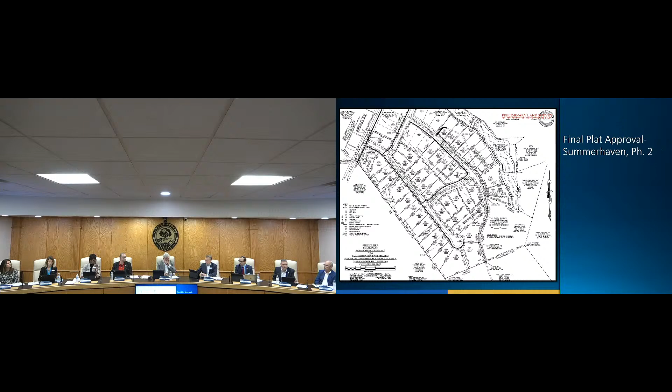Any further discussion? I would like to just say Sarah Bradley is no relation to me. And she's very happy. I'm kidding.

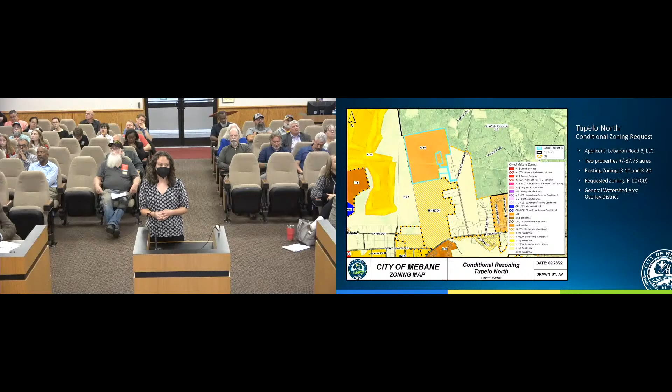As you can see, the surrounding zoning is largely residential. There is R12 conditional to the south, which is the Tupelo Junction subdivision approved in August 2020. The properties are located in the General Watershed Area Overlay District, which means there are built-upon area restrictions that apply.

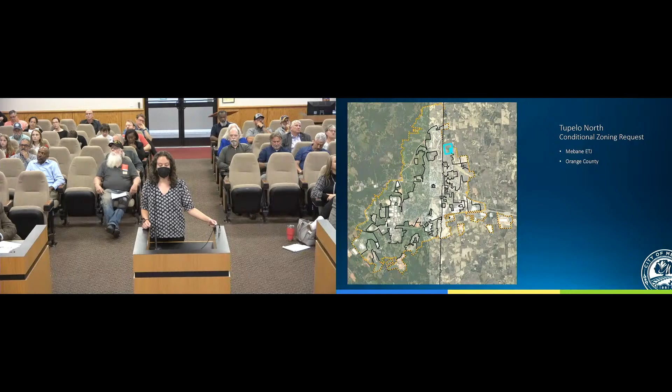The properties are located in Mebane's extraterritorial jurisdiction. They are on the border of the ETJ and in Orange County. Currently, the properties are being used for a single-family home, which has a driveway connection to Saddle Club Road. It has historically been used as a bee farm and is forested. There is floodplain on the property along with streams.

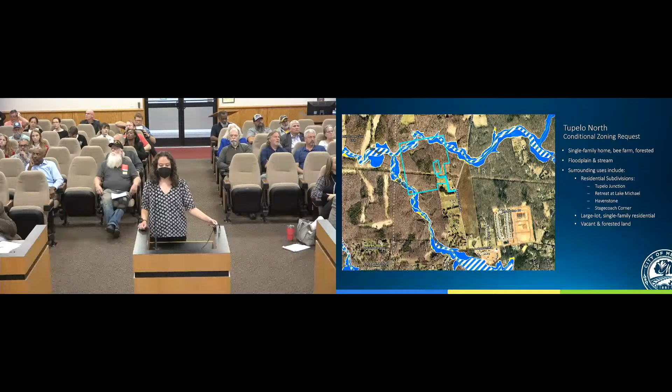Immediately surrounding the two properties are large lot, single-family residential properties to the north and east, and additionally vacant and forested land. There are residential subdivisions in the immediate area, including Tupelo Junction mentioned previously, which is to the south, and then Retreat at Lake Michael, Havenstone, and Stagecoach Corner are recent approvals. The properties are located in the secondary growth strategy area as identified by Mebane by Design, which is our comprehensive land development plan. The green seen here on the screen indicates conservation area that is identified in our planning documents when there is contiguous forest cover.

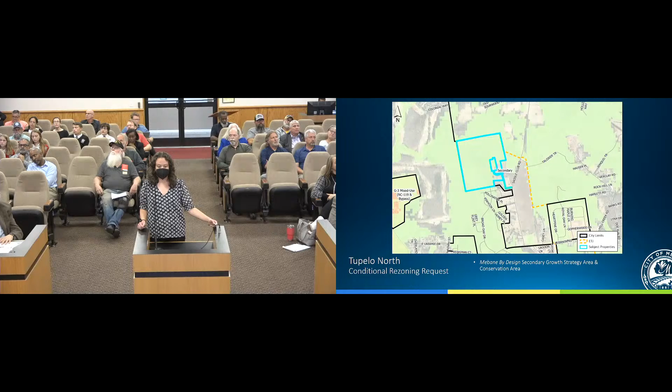The request before you is for R12 conditional district to allow for a residential cluster development of 207 single-family homes. The street network would include a 5-foot sidewalk on one side of all streets. Additionally, there is a public multi-use path network proposed running through the middle of the site, and there are traffic calming devices that intersect with that multi-use path.

There's just over 37 acres of private open space dedicated here, and there would be a continuation of Tupelo Junction in terms of the street network. There are no new driveway access points proposed as the driveway entrances for Tupelo Junction would be used.

Additionally, the subdivision required a traffic impact analysis, which was reviewed by NCDOT and city staff. The results require the developer provide a right turn lane on Lebanon Road at the intersection with Stagecoach Road. However, given concerns with that intersection, the developer has committed to completing a signal warrant analysis to see if a traffic signal would better serve that intersection and if it would be warranted.

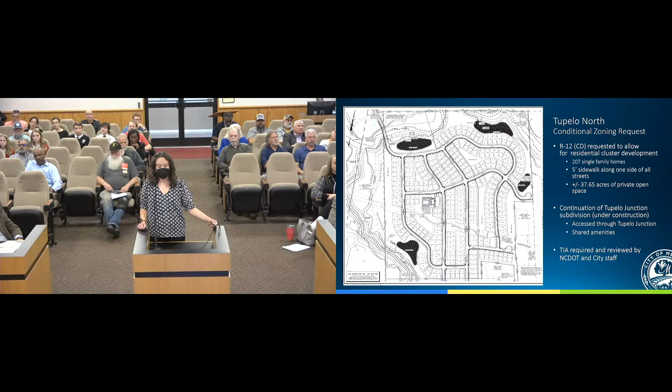As a conditional rezoning, this request is site specific. Additionally, there are certain conditions the developer is requesting, including some deviations from dimensional requirements typically required of the R12 zoning district, such as a slight reduction in lot width, along with some reduction in side, corner side, and rear setbacks.

Finally, the UDO requires that just under 6 acres of public recreation area be provided. The developer is proposing nearly a half acre through a public multi-use path, with the additional public recreation area being provided via a payment in lieu, which is allowed by the UDO.

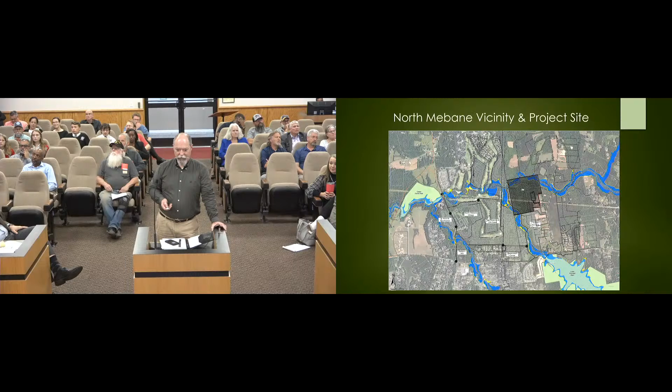Just another quick view of both Tupelo Junction and Tupelo Junction North, just to show how this is a continuation of Tupelo Junction. The landowner and the developers, for various reasons, decided to split the property up into two different transactions. So here we are now with the continuation of Tupelo Junction.

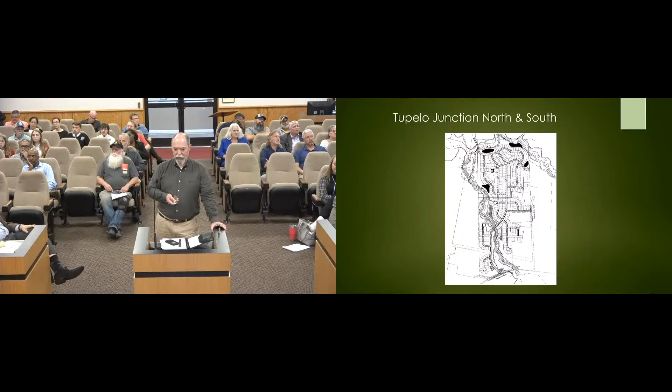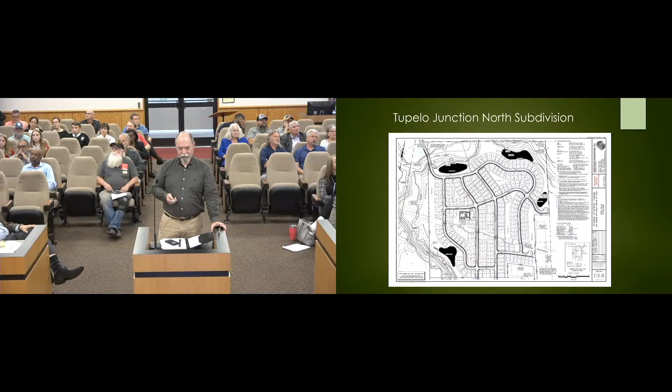Here's a closer view of our site. The current zoning, as Ashley said, is R10 and R20. It was previously zoned as part of, or rezoned to R10 as part of the Landing at Lake Michael project around 2005. They didn't split up the property exactly as it's being split up now, but our portion of the property that's Tupelo North originally had about 170 lots in the R10 configuration.

And they had lots generally in the 10,000 to 16,000 square foot size with minimal open space. For the most part, like around the perimeter of the site, the lots themselves would back up to the perimeter property lines of the site.

We're proposing an R12 conditional zoning, 207 lots in a cluster subdivision arrangement. Our lot sizes will be 7,200 to just under 11,000 square feet, and we'll be providing 37.7 acres of open space. The conditional zoning is required due to the cluster development nature, and also because we're requesting waivers for reduced lot area as part of the cluster development, lot width, side setbacks, rear setbacks, and the previously mentioned public recreation payment in lieu.

Again, the site is 87.73 acres. This came up at planning board - they were curious. Only 4 acres of that are R20, that's the existing house and access out to Saddle Club Road, and the remainder of the site is R10, that's the 83 acres.

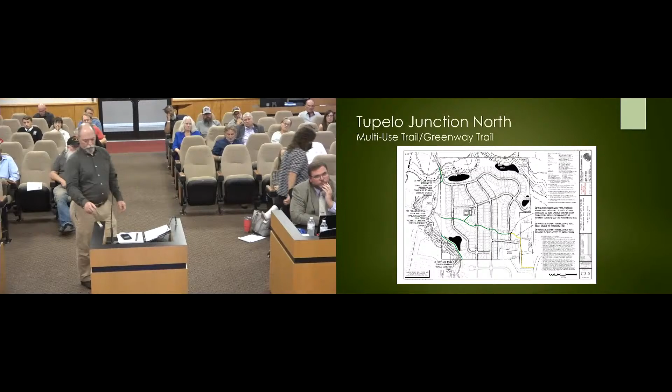Well, that was my thought process, and has been for years, that payment in lieu wasn't an avoidance of providing public recreation space, but a better way to apply the money. But it's absolutely separate from open space. Thank you for that clarification. They have to require both, so.

I think something else the gentleman said too, was that if we did a payment in lieu for public recreation space, there was no place in the neighborhood for these residents to recreate. It was my understanding that the public recreation space meant it was a park for anyone from anywhere in Mebane to recreate.

These folks will be able to use the open space. We haven't gotten to the amenity buildings yet, but we have those, and we have the multi-use trail, which will be open to anybody, but will obviously be most convenient to these folks. So they do have recreation options in the neighborhood for the residents. And like everyone was saying, we think it's generally better to pool that other money for larger, more impressive public parks instead of a bunch of penny-packet little public parks around the city.

Is it fair to delineate the difference between the private and public space? The private space is the responsibility of the HOA to maintain and preserve, versus the public multi-use path, which would be on the city to maintain and preserve. Yes, ma'am, that's correct, because that'll be part of our multi-use path system.

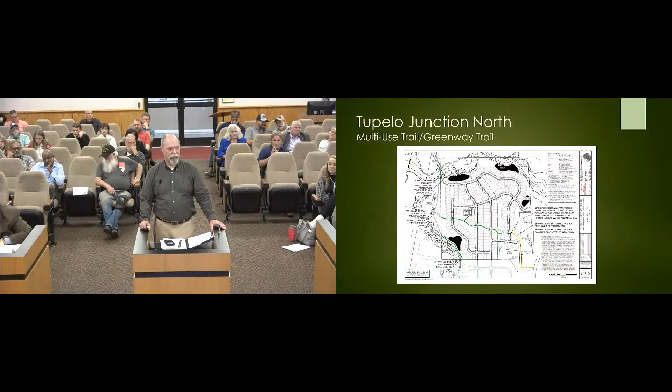I think that's another consideration for you all too—probably larger parks are easier for you to maintain than a bunch of distributed parks. So, to clarify, we typically take over these multi-use paths once there's justification of a significant amount connected, along with a trailhead. South of the interstate at some subdivisions, there are multi-use paths that have been part of the approval process. They remain part of the HOA's maintenance until a significant or justified amount is there with trailheads and different opportunities, and then they become part of the city system.

I think the earlier speaker made a comment that really sticks, and that is we need to make sure our calculations for payment in lieu keep up with inflation and the cost of properties. If it was based on $20,000 an acre and they're now going for $60,000 an acre, we may need to make sure the formulas kept pace.

But I did have the understanding that putting money toward big parks was better for recreation than trying to administer and keep up small parks. That had always been my understanding. Can you clarify the calculation of payment in lieu, just for all of our benefit?

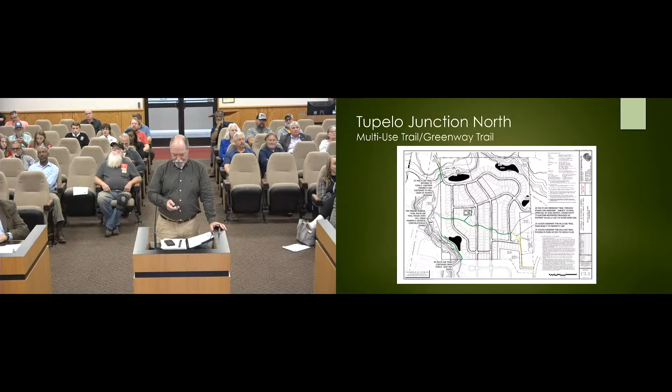We're talking about stormwater. I pointed out the four SCMs that we have, as a component of the project, open space and natural buffers, primarily located around the perimeter but also within the site. We also have supplemental plantings on the open space in the southeast corner due to the lack of existing vegetation there and the proximity of a neighboring residence.

The project will have a neighborhood amenity that's going to be a pool and pool house building with bath and changing rooms, likely a covered patio area, and that's also going to have parking for that, and the mail kiosks will be located there at the pool house.

Again, we provide a 10-foot paved connection spur to the multi-use path, greenway trail system, and that ends right next to the bike parking, so that'll be convenient. There will be full reciprocity and shared amenity use with the southern portion of Tupelo Junction, so there'll be full cross access for those folks. The people on the south can use the pool, and the people on the north can use the clubhouse building currently built down on the south side. The amenity is to be constructed at the start of the second phase.

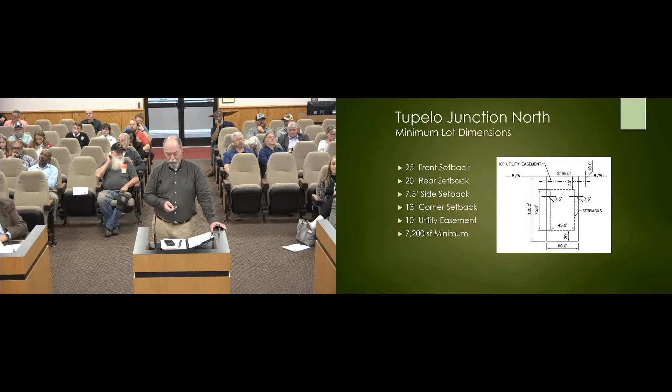We will be doing, these are the architectural commitments from the builder - fiber cement siding, which also comports with the 7.5-foot side setback we're requesting. The fiber cement is fire resistant, so that provides a little extra protection for the houses being just slightly closer together.

The exterior styles of the houses - the front elevations will include at least 2 of: horizontal siding, shake siding, board and batten, and brick or cultured stone, just to mix up the front facings of the house. There'll be decorative front doors with a minimum of 25% glazing or a window transom. Each house will have a covered front porch or front entry. Roofing will be a minimum 6:12 pitch, 20-year asphalt shingles, and a minimum 6-inch overhang.

These will be slab construction with 5-inch gutters and downspouts. All the houses will be 2-car garage, and the garage doors will feature decorative hardware. Front yards will be sodded.

The ranch plans are 1,400 to 2,000 square feet. The 2-story plans are 1,800 to 3,200 square feet, with a variety of bedroom and bathroom combinations.

What would be the rough breakdown of the ranch and 2-story among the two lots? I don't know that at this time, I'm not sure the developers made that. Curious, did they say anything?

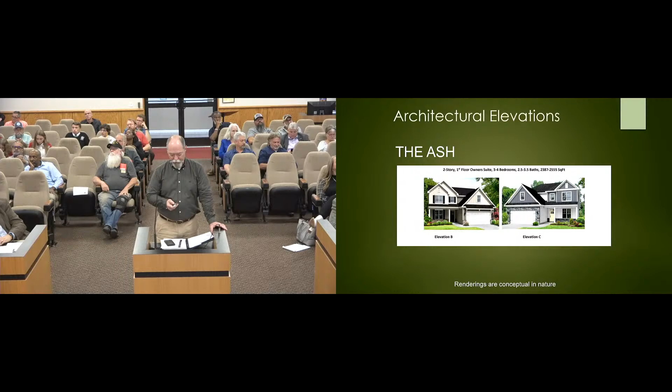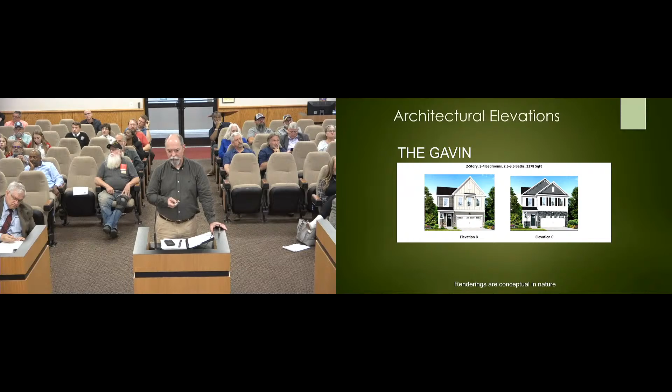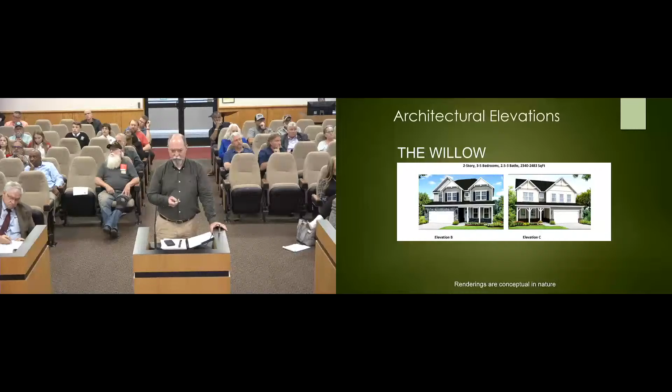So to sum up, Tupelo Junction North is designed as an R12 residential cluster subdivision with lot areas reduced up to 40% per the UDO to allow for preservation of private open space as part of the neighborhood. As a result, we're requesting UDO waivers to reduce the minimum lot frontage from 65 feet to 60, and reducing the side setbacks from 10 to 7.5.

I'll note that the southern portion of Tupelo Junction currently has 5-foot setbacks. They were developed before the UDO was updated, or they had a different waiver. We're asking for the corner setbacks to be reduced from 18 to 13, and the rear lot setbacks from 25 to 20, although we've got quite a bit of open space that helps keep the houses further apart.

The backs of the houses are further apart than even this would suggest, because we have a minimum of 15 feet additional open space behind the lots. And again, we've reduced the required public recreation space from 5.94 acres, with a half acre for the trail, for a payment in lieu of $16,000.

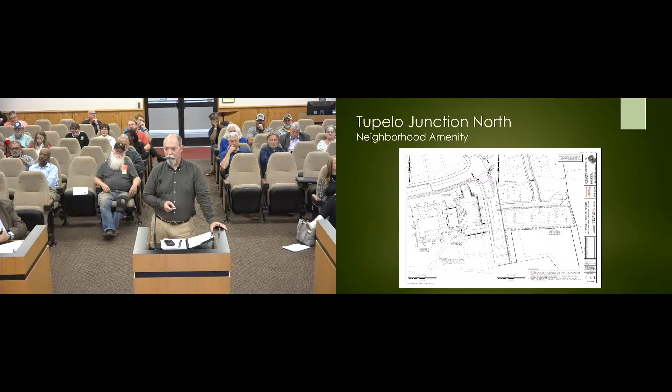Councilmember White, I might need to clarify that response. The UDO does require 1 tree, but that requirement was passed in June of this year, and the development director can correct me if I'm wrong. Since this development was submitted in May, they are not required to adhere to that. So if they do it, it would have to be a voluntary condition.

Is that something you'd consider offering? Yeah, we can do that certainly.

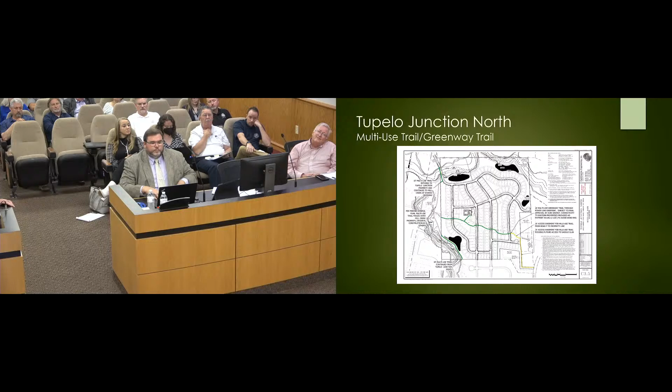Tim, going back to the amenity, you stated it would be built in phase 2. That's correct. So my question is, will you be bonding it? Let's say for example, if something comes up and you don't build this particular development, I want to protect the ones that will be there by bonding it.

I want to protect that amenity so we don't run into what we ran into in the past. Yes, that's what we're planning. So yes, bonding the amenity will be part of that.

I'll also mention that the amenity for the southern portion of Tupelo is actually already built. Again, there's going to be a full cross access easement between the two developments, so as soon as phase 1 goes in, they're already going to have access to the clubhouse that's currently constructed.

Okay, so the clubhouse is on the phase in South Park? Yes, which is technically a separate development, but there will be two HOAs, and they will have a full cross access agreement for both the HOAs and all the residents.

Thank you. I actually did have one question. The 12-inch sewer and water going northwest, will that be pending any developments, or are you just going to go straight to the Mill Creek developments?

We'll go to our property line, or just over it, possibly. No, we can't go over it because it's their property. But we will go to our property line and provide a proper connection there for them. We'll provide an easement to the property line and stop just short, and probably have to bond a short section of it. No loop at this time. No.

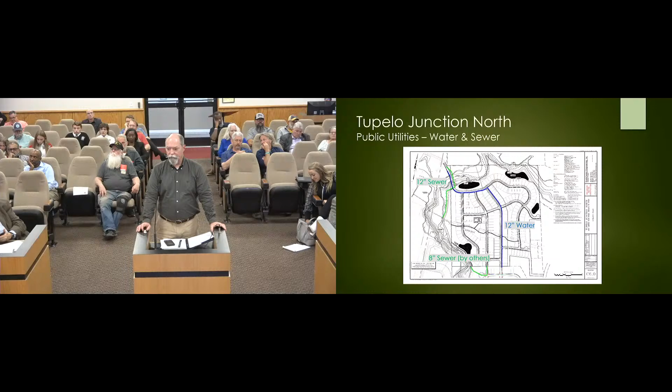Bill Cuff with Earth Centric Engineering. Just wanted to clarify something.

There actually is a water loop there. It would just be that the 12-inch is like the main trunk line, but because of the way the water is actually directed through the other lots or through the other roadways, it does create a loop system through there as well. So that will stabilize the entire set of water line.

The main reason for putting that 12-inch trunk line is to actually provide better stabilization for the groups further north of us. So that is the purpose there, is to upsize that line for that. And that would be done with the work with the city in terms of, as Tim said before, calculations. I believe if you actually calculate it out right now, it would actually work with an 8-inch line through there.

But the city would prefer the 12-inch because it does provide better service. So there's already a connection there from the northwest. Not yet, but it will. It is intended to, when they extend down, when the neighboring Mill Creek development extends down, it would tie into that.

I think what Phil was saying is we do create some loops, like we have water connections. We have 2 connections with water to Tupelo South. So if something were to happen to this side, it can provide connectivity, and several of these loop around. So there's a lot of interconnectivity. It's just the eventual large loop, Mill Creek, that's still kind of out of our control, but we're providing the access.

As soon as it stops being a bee farm, somebody's going to be assessed for the full tax value. But at this very moment, technically, the assessed value is $20,000 on those 83 acres. That's why they can come in and say, 'according to the formula, we only owe you $16,000 instead of 5 acres of public recreation space.' And if the rules lead you to an absurd place, you don't have to follow them there.

Thank you, Mayor. Dan Shannon. My home is 4681 Mebane Rogers Road. I'm about a mile and a half from Tupelo Junction, and I have a daughter and her husband who are approximately 2 miles from there.

Chief Wells, in the spirit of looking at how the fire department would handle this, I'm sure Mebane would offer support, but can you tell us how the fire system out of Orange County, the closest one there, and how Mebane would respond to a house fire there?

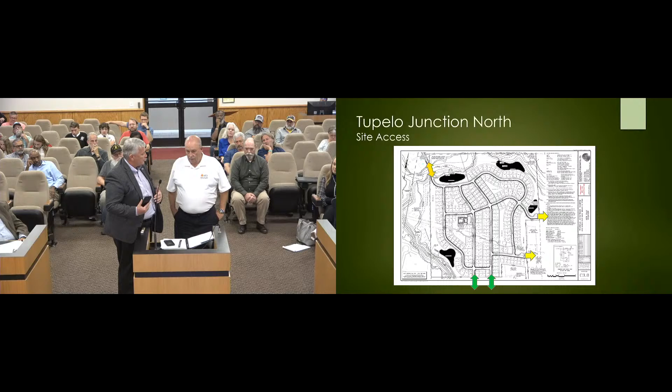The question again was, how are we going to handle a fire in that neighborhood, the support in that area? I know it's mostly in Orange County, but I'm a mile and a half from there, and my daughter is 2 miles inside Orange County in Efland.

Currently, Mr. Mayor, members of the council, it's in Orange County, outside the city limits. It's in Efland's fire district. It's going to be in the city limits, so it will continue to be our primary response, and Efland will respond mutual aid on working structure fires. We also have other resources we can call as well.

Does that help you? That does, but there's also concern about another development across the county lines, about 1,500 houses and condominiums I believe. Is there discussion or potential for another station anywhere near there? We just recently had an analysis done on station locations, and the two target areas were west and east, south of the interstate.

There's a station within 1.5 to 2 miles of that area. It's manned with an engine company, a ladder company, a rescue company, and a brush truck. So you feel like it's adequate with the amount of housing proposed in that area in the next 5 years or so?

I think so. But stations are decided mainly by response time, correct me if I'm wrong, guys. It doesn't matter if it's 1,500 houses or 50 houses, it's only the response time that's important in where you locate. Is that one of the considerations or the only consideration? For ISO purposes, when they evaluate a fire department, they've strictly gone to, we used to do the 1.5 mile districts.

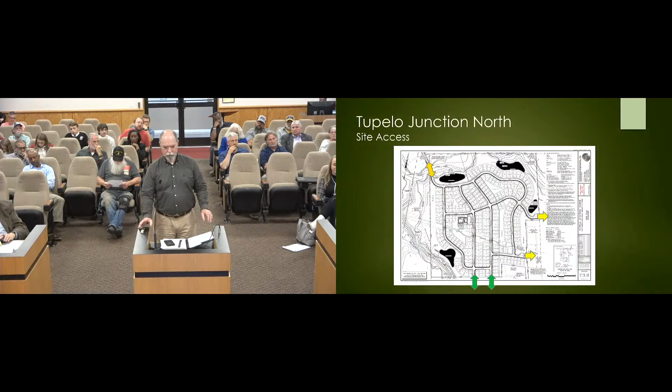Thank you. Also, Mr. Mayor, Chief Lewis attends the technical review committee, and this type of material is discussed as part of that. There have been some areas where we cannot provide fire coverage, and we've shared with the developer at that point that it's an issue, and sometimes they don't move forward if we can't provide coverage.

Could we get a little more clarity on some of Mr. Cannell's comments regarding assessed and deferred tax values? I don't want to get into a legal quagmire, but I do want to understand the situation.

Legal quagmire is the example there. The same answers still apply. We still have to follow court precedents and general statutes. I understand his statement that it would be better if revaluation was done more often, if the requirements related to being a farm didn't impact the property or the tax rates. But though we are a Dillon rule state, as local government creatures of the state, we have to have general statute authority to undertake things.

Also, referencing court precedents, this is the same as we went through with our system development fees. We have to be very careful in justifying what we charge. The city attorney has looked through this in the past, he continues to look at it, and we do as well. But I would say the same answers still apply, and also the answer from the Recreation and Parks Director about centralized parks still applies.

It's a very delicate and complex situation, and I'm not making light of it. It's just very difficult to ensure we will not be in a lawsuit where we lose and have to pay significant damages, which has occurred for other local governments in North Carolina. So, I certainly don't mind, and I'm sure council doesn't either, passing on these concerns to their General Assembly delegation.

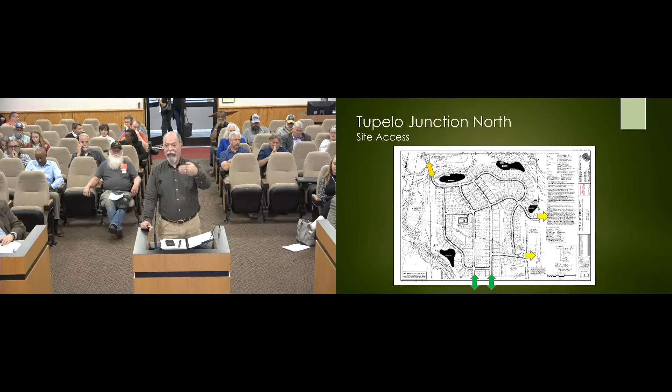Any other questions from the council? All right. Yes, sir, Mr. Mayor.

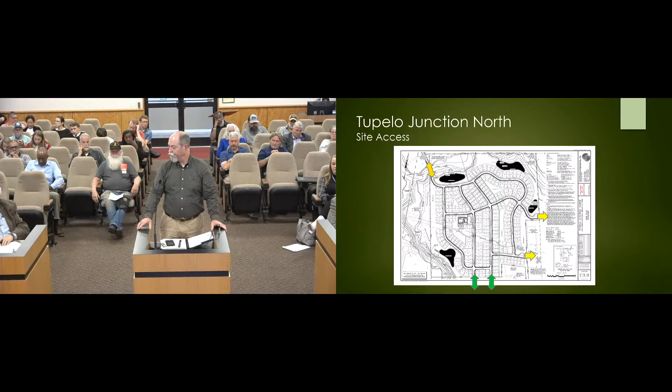Is there any further questions from the citizens? All right, Councilman, make a motion to close the public hearing. Got a motion and a second to close the public hearing. Any further discussion? If not, all those in favor say aye. Any opposed? All right, motion carries to close the public hearing.

Okay, what's the pleasure of council? Thank you very much. Sorry, you're not done yet. No, I was actually going to make a motion.

What I was going to say is I typically am a bit of a stickler on setbacks, but I have had the opportunity to see this concept with one of these builders from the Tupelo subdivision in sort of the cluster setting, and they've done an amazing job with the recreation space. So in consideration of that, that's where my motion is coming from.

I would like to make a motion to approve the R12 CD zoning as presented, and to find that the application is consistent with the objectives and goals in the city's 2017 Comprehensive Land Development Plan, Mebane by Design. The request is for property within the city's G4 secondary growth area, which is generally residential and commercial in nature, is providing community facilities in the form of a greenway consistent with the growth management goal, and provides greenway and open space in a developing area connecting to other locations, consistent with the open space and natural resource protection goal.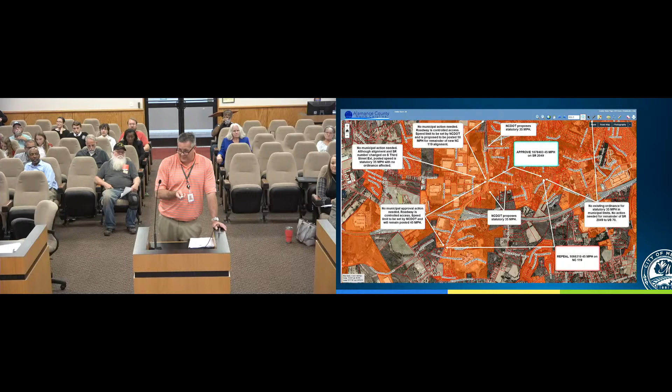Need a motion? I've got some other maps, you want to take a look at those? So this was the 119 area, this is Mebane Oaks Road. There was an existing 35-mile-per-hour ordinance at Mebane Oaks at 5th Street. We're recommending to repeal that ordinance because it's within the city limits and you don't need an ordinance for that.

This is for the new alignment of SR 1973 near the town public works facilities. We're recommending the town concur with the 25-mile-per-hour ordinance on the new section, especially with all the athletic fields and trucks coming on and off that. This is consistent with what we're doing outside the city limits - it's 25 in those residential neighborhoods, so it'd be a uniform speed limit through that area.

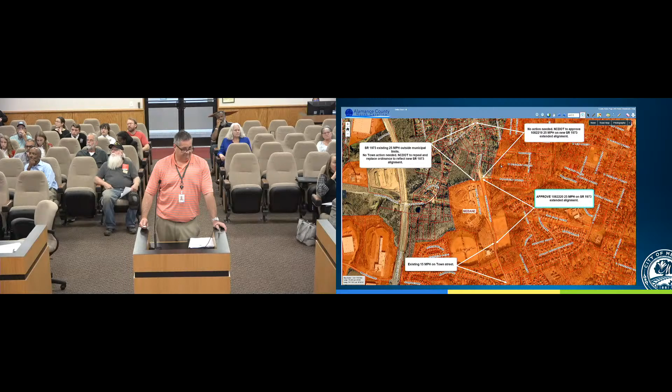And the last one was on Center Street. It's just changing the reference from 119 to the secondary road number. Limits remain the same, speed limit remains the same. That's all I have. I'm here for you guys.

Any questions? For general interest, could you just explain the process for speed limit review? Because we do get questions from the public about speed limits and how they're decided, and this might be a good opportunity to clarify that. In general, we'd start with your local DOT contacts and ask for a review, and I would preface that by make sure it's on a state road. If it's your road, you can certainly address that without DOT involvement.

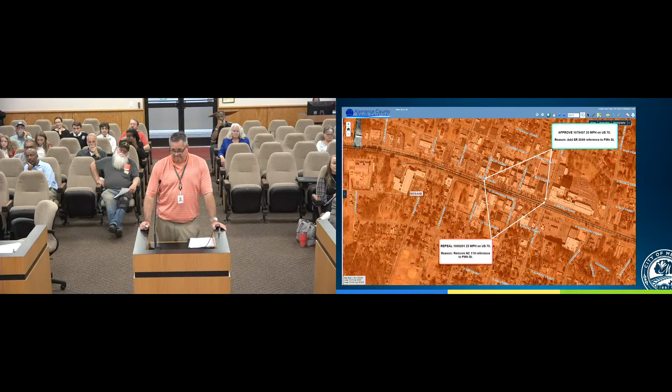Any other questions? If not, need a motion. To reflect the rerouting of North Carolina 119 from 5th Street to the newly constructed alignment, and assignment of secondary road number SR 2049 to existing 5th Street, I make the motion to repeal the 45-mile-an-hour ordinance 1066310 on existing 119 5th Street and approve the 45-mile-an-hour speed limit ordinance 1078403 on State Road 2049, which is 5th Street.

Make a motion to repeal the 25-mile-an-hour ordinance 1000201 on existing US 70, which is West Center Street, and approve the 25-mile-an-hour ordinance 1078407 on US 70, which is West Center Street.

I make the motion to repeal the 35-mile ordinance 1051184 on State Road 1007, Mebane Oaks Road. Note there's no replacement ordinance required since the posted 35-mile speed limit is covered by general statutes within the city limits. And to reflect extension of State Road 1973, Tate Avenue to Rigador Street, I make the motion for approval of the 25-mile ordinance 1082220 on newly constructed State Road 1973 within municipal limits south of Roosevelt Street.

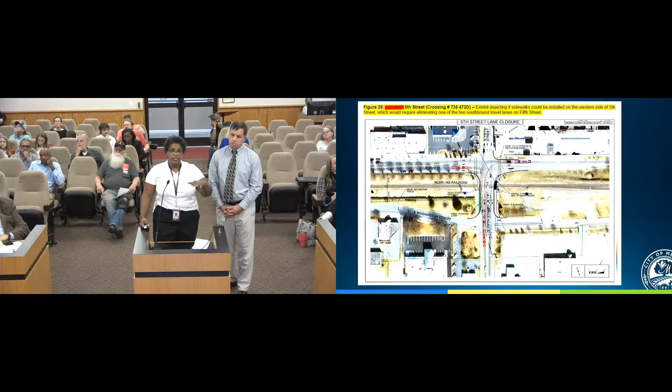Is this kind of your final proposal, and now you'd want to do studies to move ahead, or where exactly does this stand? The way the TSS works, it's an actual presentation of recommendations. It still needs to go through the design process to come up with the actual measurements, the through points, etc., to make a final decision. So right now what you have is just an overview of what we're recommending for safety purposes at this intersection. There were some feasibility concerns due to elevations on that southwest corner. Does that mean those have been resolved, or that they'll just be looked at further? They will be looked at further.

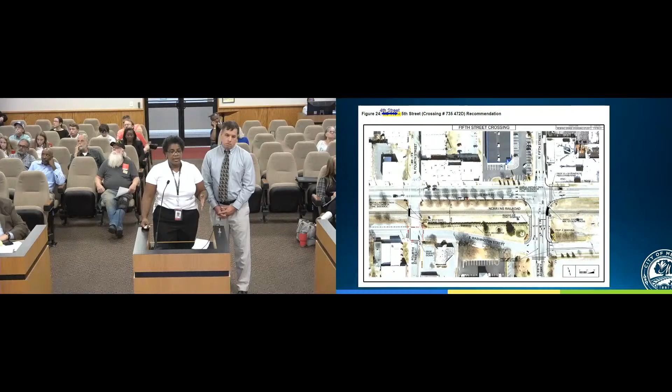The next intersection is Fourth Street. Fourth Street will be adding a sidewalk onto the west side to allow for better pedestrian movement from Washington to US 70. The same will hold true for Third Street, to allow for ease of pedestrian movement from Washington to Highway 70.

When we discussed Third Street, I forget the name you had for it, but there was like a back and forth idea. Is that not here? Yes, here, that's a Z pattern. That's right. What we presented to you previously was what was discussed back in 2018. But due to the fact that we have a changed council, we're looking at it based off the actual recommendations provided in the TSS and starting from that point.

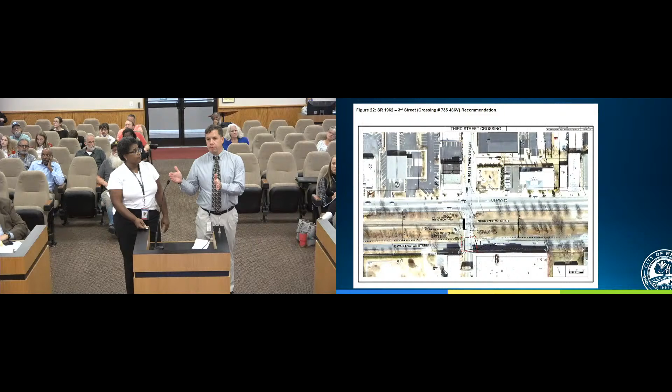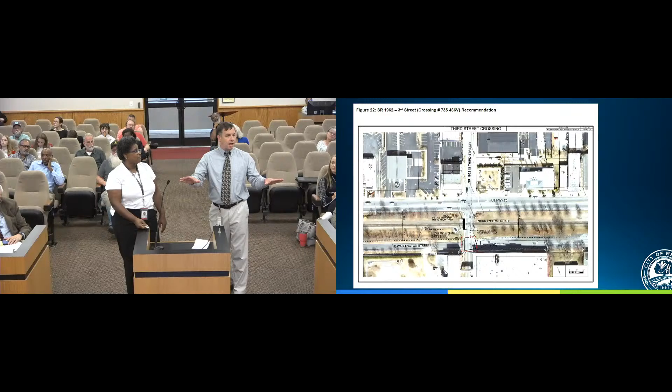One thing on Third Street that was brought up in a previous meeting was sidewalks on both sides. That's still on the table at this point for Third and Fourth. It will take full surveys in coordination with North Carolina Railroad to figure out whether sidewalks on both sides are going to be acceptable. So further conversations there, yet to be determined. Right now, again, high level, but we do still have those on the table for further consideration.

And last is Moore Road. Our recommendation is to have medians installed. These medians are to prevent drivers from crossing through the barriers when they come through, because it's a 2-quad intersection with regards to the rail barriers. It is still up for debate, still up for design recommendations and considerations as we move forward. It has not been finalized at this point, so we are still open for the city's comments and concerns related to this particular crossing.

Can you clarify the word median? Because I think to most people, median means something this high that you see on the interstate. There are different types of medians depending on the actual traffic that's going to be carried. This one will be 6 inches, and about 50 to 100 feet in length. Typically the medians within the sealed corridor are approximately 100 feet long, based on previous studies, that's the desired length for effectiveness. That's uniform across the sealed corridor, and the sealed corridor is Raleigh to Charlotte.

And the state, DOT, and rail will pay for everything on this project? Yes, we have funding available for this project. Everything. Yes. Good, thank you.

When these plans are finalized, are they represented to us or just worked through staff? Worked through staff. So what we're here tonight to present is the findings of the traffic separation study itself, and what we're asking of council right now is a resolution of intent to move forward with engineering design, so we can officially move forward on the project.

What's the rough time frame for engineering design, and at the end of completion, would these be done simultaneously? So typically the way it functions is once we get this resolution of intent, we'll enter into a 4-party agreement between the state, the two railroads, and the city. That allows us to begin the process. One thing not yet done is the environmental document, which will have to be completed as part of the project before we can finalize the plans. So it's going to take time. Some of that can run concurrently, but it will take time to get to this point.

So 6 months, year and a half? Typically around about a year. And then once that's completed, how much time to do all the work? The intent is this will be a project let through Division 7, so it'll be worked on based on their time frame.

These types of projects are something they do as a courtesy to Rail Division, outside of the normal STIP projects that flow down through Division 7 for management. So this is something we work with them to fit into their schedule. We can't commit to that at this time, but once we get close to that date we'll have an idea, and we can work with staff to transmit that information to the city. This is several years down the road, we're a couple years down the road.

Well, it's a great improvement for safety and pedestrians, and Mebane, particularly downtown, has a fantastic pedestrian friendly city. This will help a lot, particularly with the construction of apartments right there on 3rd and 4th. I think it'll be a great addition. Correct, and this is a great response and improvement to the accidents at this street, as well as pedestrian trespassing that occurs within the corridor, so there's fencing.

That's part of this project to channelize pedestrians to these at-grade crossings, to prevent them from crossing the rail corridor in non-at-grade crossing locations. So it's both a vehicular and pedestrian safety project.

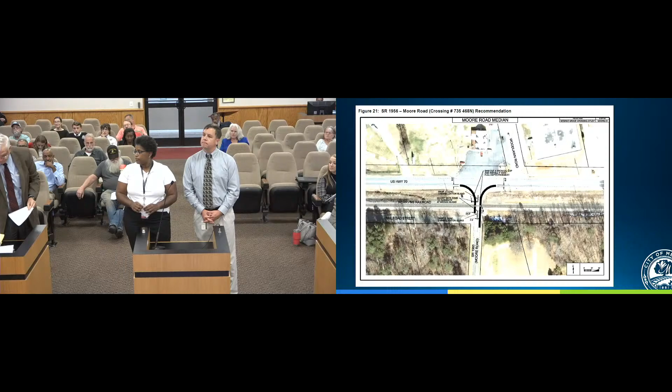Does council have any other questions? Mayor, I had one clarification. On Fifth Street, are we still talking about a median with a mountable median at the intersection at Washington? That is correct. And you guys are going to pay for the fence too, or is the project paying for the fence? We will pay for the installation of it, yes. The city will be responsible for the maintenance.

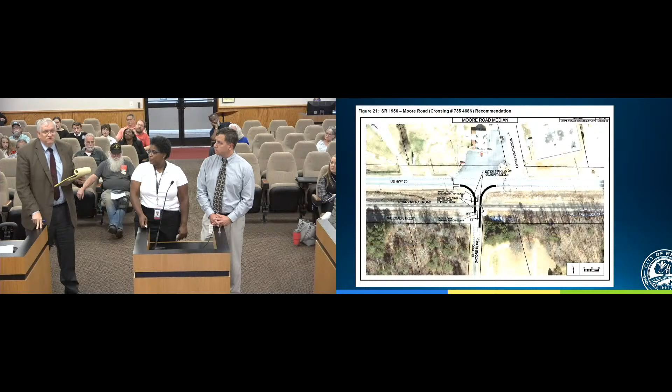Mr. Mayor, I'd like to speak on this matter, if I may. Mr. Mayor, I understood from the presentation that these DOT representatives from the Rail Division have met individually with each council member. Is that correct? Mr. Mayor, I found that to be a very objectionable aspect and procedure. This council is supposed to conduct its business in open session, not individually, one member at a time with some special interest, even if the special interest is the State Department of Transportation. This is not appropriate for the council to have had sequential meetings with a special interest group.

I would certainly hope that the council would avoid this manner of operating in the future. In the meantime, however, we will want a copy of all correspondence between members of the council and the DOT on this subject. Anything that has happened, any notes from the meetings. This is really, to be honest, quite outrageous and extremely disappointing.

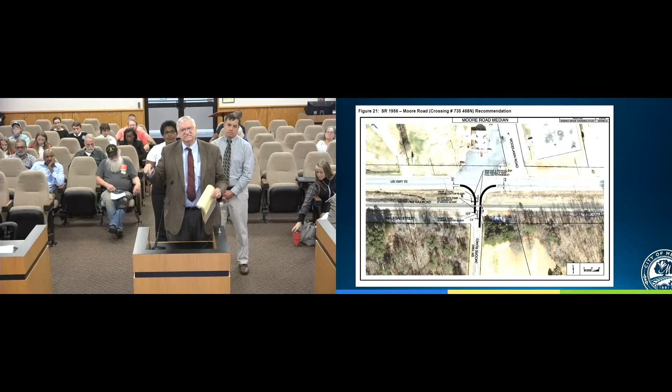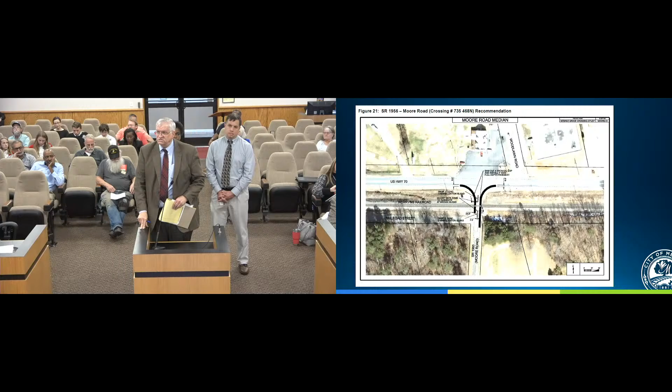And if it is so routine, it could have been done at the public meeting, with you all giving your opinions to them and the public perhaps. What a novel idea—let's let the public have a little input. But no, apparently this group met with just individual members of the council. I think that was a great failing in public policy of this board on that occasion and topic.

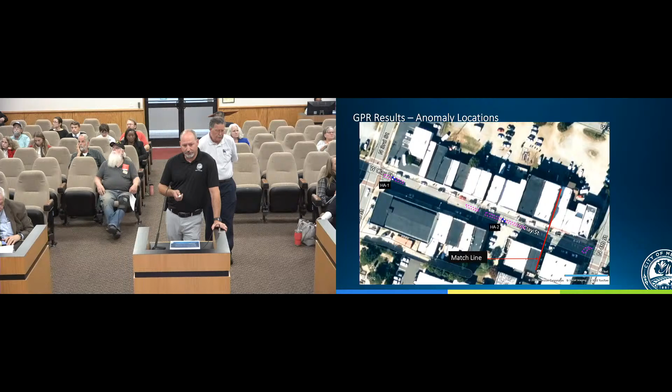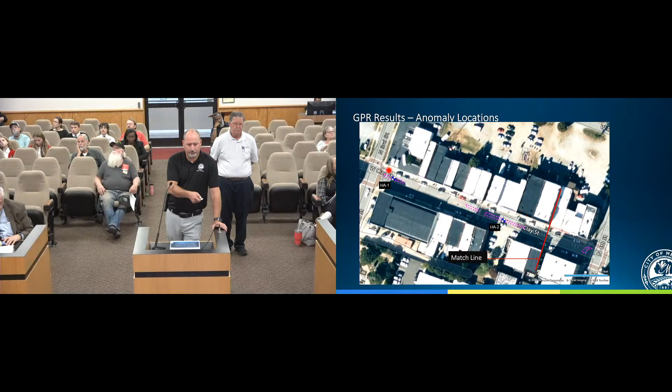Terracon came out in April using ground penetrating radar to scan the entire Clay Street section from 3rd to 5th. What you see here is four areas identified on Clay between 3rd and 4th, these purple areas that I'm highlighting. Moving on to Clay Street from 4th to 5th, we had an additional area identified down towards 5th Street.

After we made that excavation a little larger, we could get down there and take a picture. It's a sag under the street, probably 6 inches deep in that area and about 4 feet long, what we found.

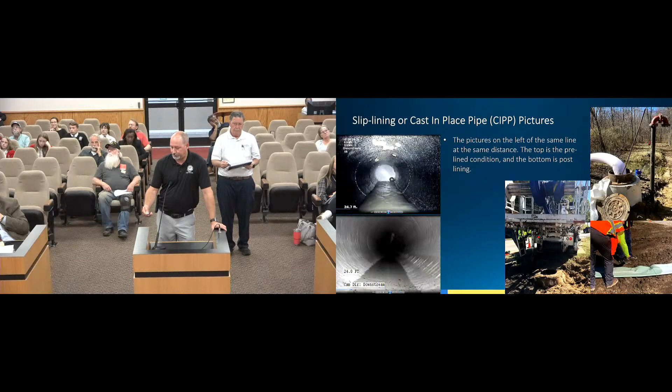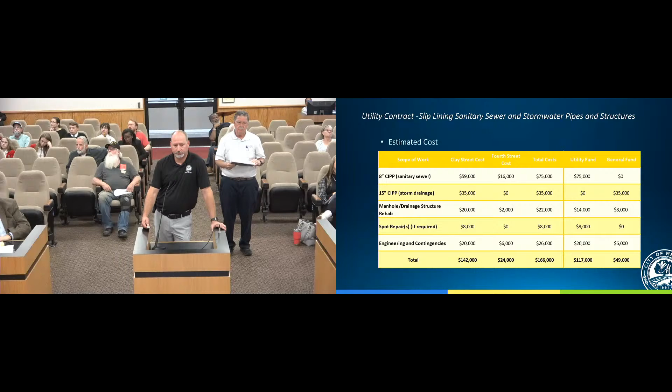Our estimated cost for slip lining the sanitary sewer and stormwater is $166,000, where $117,000 of that will come out of the utility fund and $49,000 out of the general fund. That's all the way from 3rd to 5th, and 4th Street.

And onto the high density polyurethane structural resin. We researched multiple options trying to figure out the best way to fill these voids without completely digging up the street. We came upon this product through recommendation of other geotechnical engineers. They've been using this successfully on numerous projects across the state, including airports and I-95.

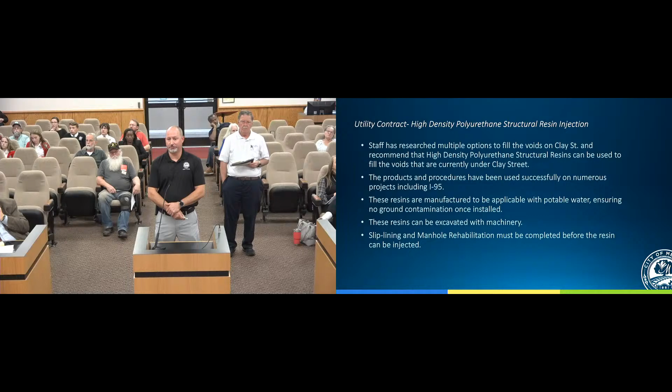Again, slip lining the manhole and manhole rehabilitation must be completed prior to this, so we don't fill the sewer and stormwater lines up with this material.

You gonna slip line the ones on Clay down there Fifth too? Where there's a- Yes, sir. Just a quick minor question. So the slip lines, they should not be damaged whatsoever by HDPR when that expands? There shouldn't be, cool. That's why we slip line it beforehand. Yeah, just making sure. Okay. As long as you don't have a crack in that pipe for that stuff to get in, you're good.

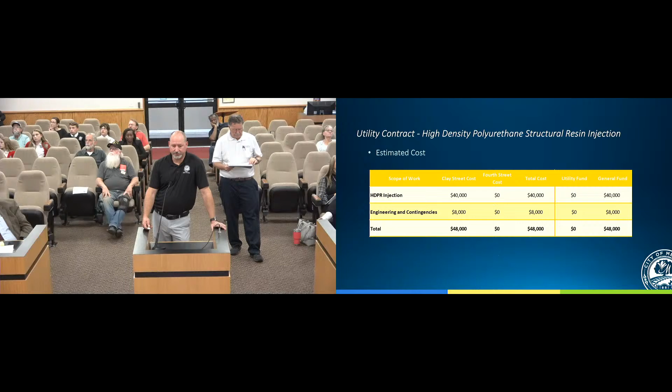And the estimated cost for the structural resin injection is $48,000 out of the general fund.

And last, on the utility contract, we're looking at water line improvements. Like Mark had said, those lines are 100 years old. The existing cast iron lines that are out there now are subject to breaks or leaks, all the buildup. Anytime you go out there and resurface a street, you're shaking those old joints, and you can cause potential leaks. Back when Clay Street resurfaced in 2011, I know they had at least 2 leaks due to the work that was done.

We're proposing going in and cleaning those pipes and installing an epoxy liner. It's going to take roughly 10 to 15 work days to complete the work. It will take out existing valves, so we'll have to replace those. Anything that's mechanical will have to be replaced. No hydrants will be in service during the installation of the epoxy lining, but the fire department, we've been speaking with them, they have a plan. Chief Lewis is here tonight to speak on that.

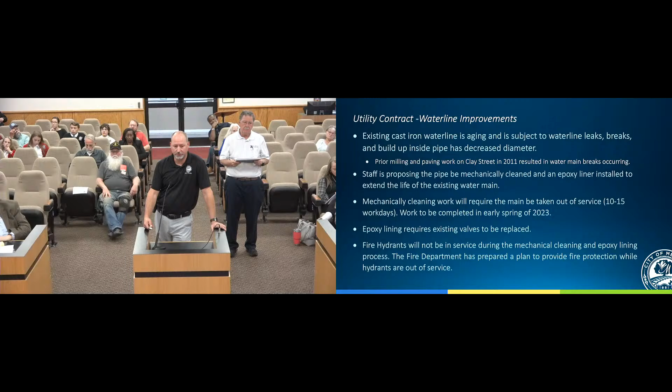And the procedures for the mechanical cleaning and epoxy lining: first they'll install the temporary bypass service and take the existing line out of service where they can go in and video inspect that line and map it. Any repair points that they find will have to be done prior to them actually going in and cleaning the line. They've got to get it to a point where that new epoxy will stick inside. So they'll go in and abrasively clean it and mechanically scrape that pipe until they get everything clean. Then they'll go in and line it with the epoxy liner, which uses a little robot with a spinning head that goes in and sprays throughout the center of the pipe. After that's complete, they'll test the new water line, disinfect it, and then put it back in service.

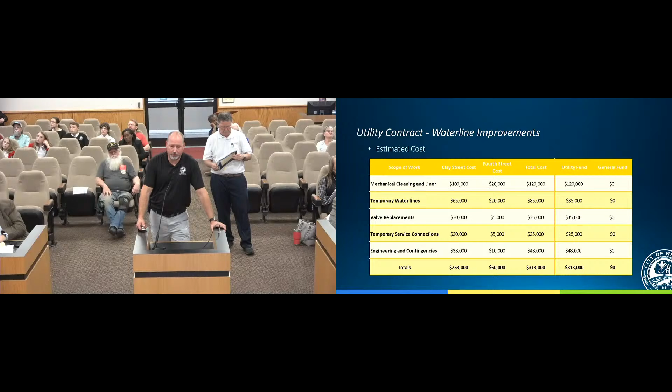And the time frame again, how long would it be out of service? Estimate 10 to 15 working days. Okay. And our estimated cost for the water line improvements is $313,000 coming out of the utility fund.

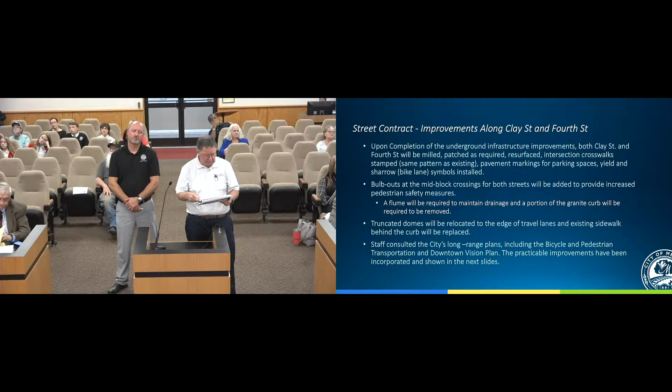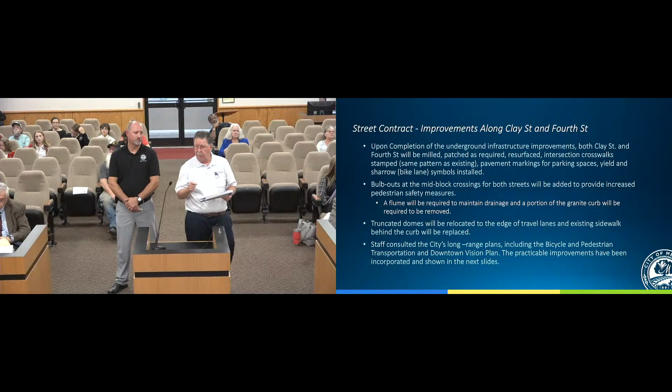All right, back to the streets. Once we get all this infrastructure that Kyle has just laid out for us, we're going to come back in and, as I said earlier, put in the bulb outs for both streets, one at the mid-block of Clay and the other at 4th. We'll have the flume we talked about and the truncated domes we spoke about earlier. We also coordinated with staff, with Ashley and the planning department, on the bicycle and pedestrian transportation downtown vision plan, and tried to incorporate all the practical improvements listed in that plan.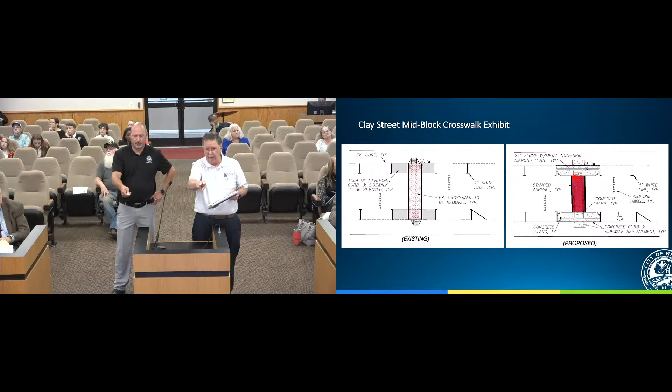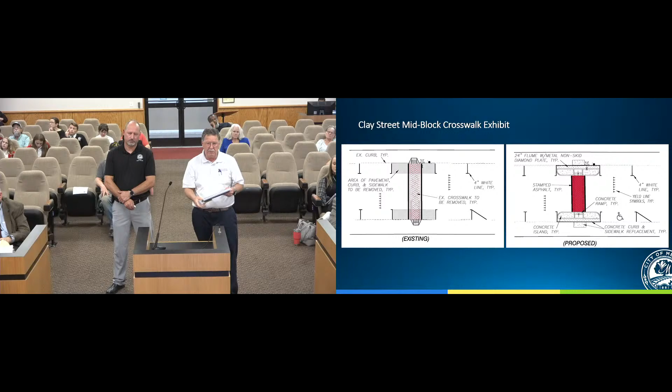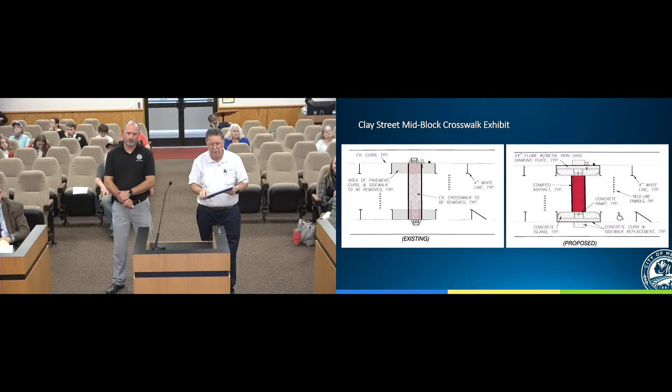And then we'll have to put in a flume to address the drainage. That will consist of a metal plate about 3/8 to 1/2 inch thick, on top of the curb, 2 feet out from the face of the curb. We'll remove that granite curb and put in concrete curb so it's level and smooth, taking out all those imperfections. Then we'll slope from the edge of the flume, the metal grate, back down to the edge of the existing pavement at the red line. Is there any questions on any of that?

The gray area on either side of the existing crosswalk, which isn't big enough to be a parking space, how is that designated today? The parking space terminates right there at those corners, and the other one over there as well, allowing people to pull in and pull out at that space.

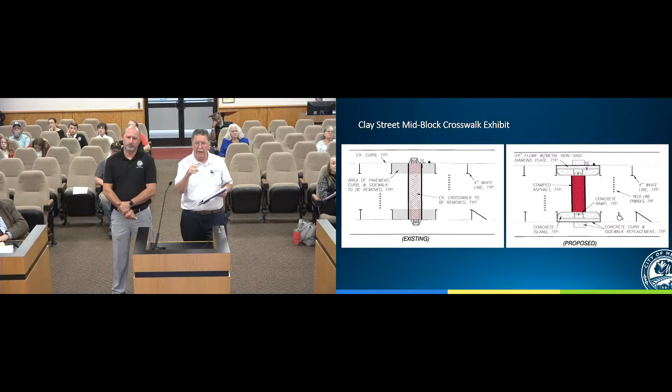So what we'll be doing in the proposed plan is adding raised concrete, with a radius at each corner, so cars can't get in and out of that, which helps promote pedestrian safety. It's presently just pavement, asphalt, with no lines, but not enough space to park a car.

It's about 8 to 10 feet over here on Clay Street, a little less than that on 4th Street. This is the one for 4th Street right now, with the 2 white lines coming across. We have steps on the west side of 4th Street, so that cannot be an ADA-compliant crosswalk. But we're still going to put in the flumes and raised islands, and slope back down on either side to make it a little better for folks to get in and maneuver. You will still have those 2 steps though; we're not planning on doing anything to those.

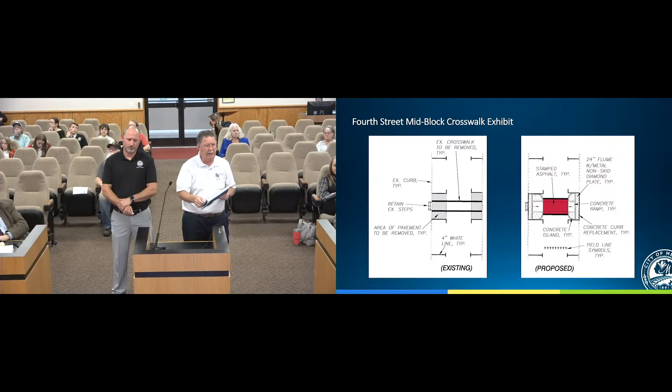And again, our estimated cost for doing the milling, the stamped asphalt, the pavement markings, and everything is $473,000, and all that will be coming out of the general fund.

I didn't mention, but when we did the layout for the parking spaces, what we used as a guide is the North Carolina Building Code. Typically the building code requires access from a parking space to an entrance of a building of approximately 200 feet, and we tried to use that as a guide. That's why we put them near the intersections and mid-block crossings, plus one at 4th Street at the existing corner, and one on 5th Street just a little north of the intersection, which is a T intersection with a driveway going into the townhomes there.

Okay, let's see. I believe that was about it, wasn't it? We do have the picture, and we had the summary statement. I'll let you go over the utility summary.

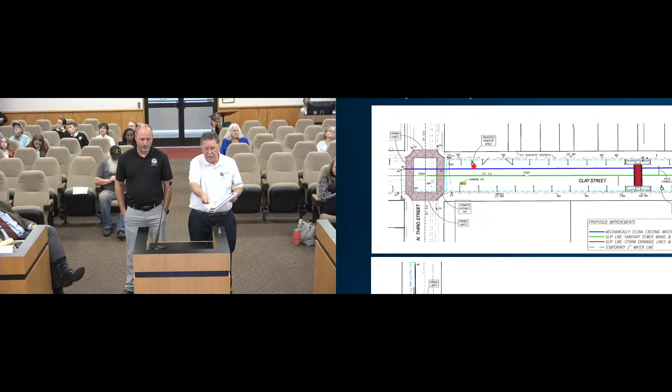So let's go to the next slide, and Preston, can you zoom in there at that first corner? We'll show them where that parking space is—the top one. We have one that we're putting in over here at this side, right here. This is the first one I mentioned. The second one is down here at that crossing. And the third one will be on down on Clay Street.

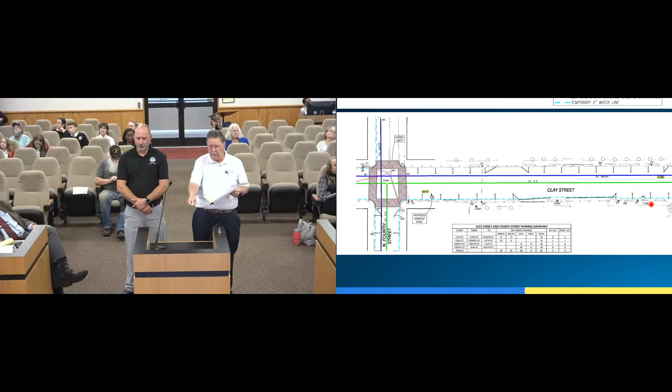We've got to come back over here—that was a match line. We've got one here, and if you scroll back over a bit, this is where this other space is, right up in here, just a little bit north of that crosswalk.

And then we also have one on—well, this is the sharrow. This is what we're talking about doing here to make this more visible, putting the city's green. That may not show it, but this is going to be the city green and your logo with the sharrow symbol here on the black asphalt. We hope that will make it more visible for bicyclists.

And the next slide—which one? This one. This one over here is where the existing space is—I've got to get my bearings, back over here. This is where the existing space is now, at the corner of Center and 4th.

By this map, I'll just point out that the green line is the sewer, the blue line is the water, and that's where we'll be doing that work. The red is the storm drain—you can see a little bit of the red, where'd it go, whoops, there, this is the red line. These are the storm drain lines that we're talking about doing as well.

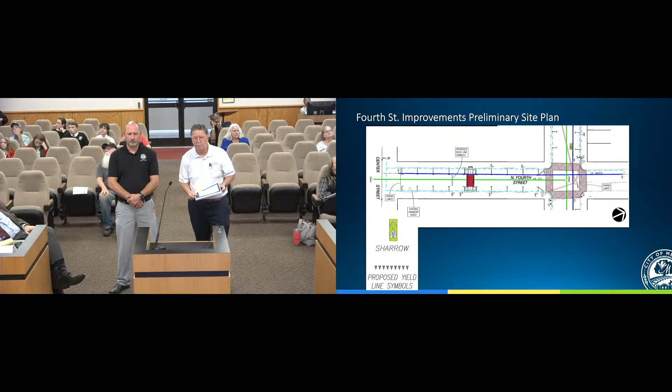Okay, and then, yep, you had me there, didn't you? Okay, what we're looking at for the total cost of everything is basically going to be $1 million. We're talking about 432 out of the utility fund and 568 out of the general fund.

You describe these numbers as estimates, and we haven't bid yet, and I know estimating can be very difficult. Can you just comment on whether these estimates could be way off? And if they were way off, I'm sure they'd end up being more, not less—the bidding environment has substantially changed.

I know, Kyle. I've actually reached out to some contractors in the area and had them come out and take a look at things and give us what an estimate would be for each of the water, the sewer, and the HDPE. Also, if we have consensus from council on this plan of action, we plan to immediately move as early as tomorrow to begin the bidding process to come back in January with bids, so we're going to try to capitalize on these estimates and keep it in a close time frame.

I will also say we've done an estimate on what it would be just to do a direct replacement for the water and sewer, and you're looking at over $1.5 million just for those two, nothing else. When you say that, you're talking about trenching, recompacting, and putting in new water lines? Yes. It's only $500,000 more?

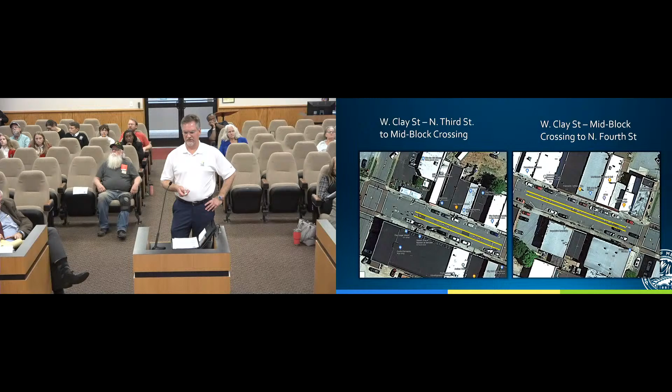As I mentioned, the contractor and Preston said we actually already have contracts in place and the contractor is ready to go, weather permitting, a week from today. We will have to close West Clay Street to traffic for that one day, from 3rd to 4th, for them to get in there and perform the milling operation as needed, and then pave back. It would be very dangerous to try to have that road open to traffic, but they can also expedite their construction activity by closing that one block.

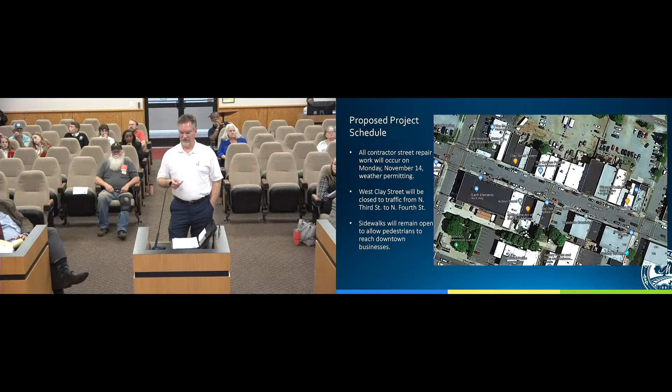The sidewalks would remain open to pedestrians to reach the downtown businesses. I appreciate you guys doing that on a Monday, because a lot of the storefronts are closed on Monday. And that's why we chose Monday. I looked ahead already, and it looks like the weather's going to be favorable for us, if it holds out. So yes, thank you for that.

The contractor performed milling operations in the middle third of Clay, basically cutting a groove in the road down to that concrete layer that you saw, and we're just going to pave it right back. So essentially what we're doing is creating a big patch that'll be even in West Clay Street.

This will definitely improve rideability and eliminate these tripping hazards. The price we have is based on that, but it could fluctuate depending on what we find when we start the milling and paving operation, depending on the depth. It's right around $15,000, and that could fluctuate just a little bit.

So this patch that you'll be creating will encompass several patches already on the street and clean that up. Yes, as a temporary fix to get us through the holiday season and et cetera. Exactly, that's wise. Any questions about that?

Is it not risky to do that before you've got the line replaced? So what we're planning, crossing our fingers, since we do have the photographs you saw showing the asphalt layer sitting on top of that concrete layer, is to mill it down just above that concrete layer and kind of scrape that asphalt layer off.

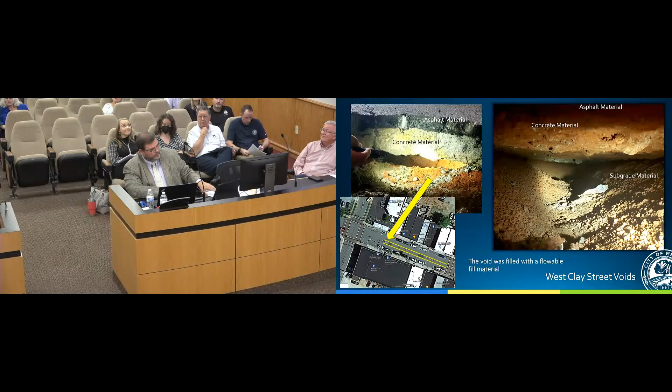As I said, we've got contracts in place, so we're ready to move forward right now. Come 7:30 Monday morning, we'll have crews out there blocking off streets and getting ready for all this.

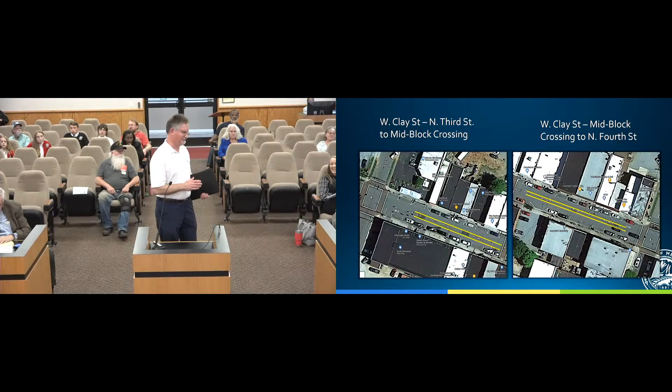I'm glad we have a PIO in place to help with this project. This is a great thing for her to cut her teeth on — she's been great to work with. Because there's going to be a lot of public misunderstanding about what we're doing here, and why would we be ripping up the street right before the holidays when we're actually trying to help with the holidays, but people will misunderstand that, et cetera, et cetera.

When we're done with this, the ride quality of this road is going to be so much better. We also have a Christmas parade coming up with probably hundreds to maybe 1,000 people, a lot of young people, walking straight down the middle of that street. So our hope was to get this temporary patch in before the holiday season and before the Christmas parade.

Thank you. All right, council, what's the pleasure?

I'd like to make a motion to proceed with the advertising for utility and street contracts per schedule in the PowerPoint presentation, and making temporary street repairs as needed by the public works department. Second that. All right, we have a motion and a second.

Any further discussion? I just want to thank the city for all the hard work that's gone into preparing for this. I know none of us really want to do this, but we clearly have to. All those in favor say aye. Aye. Any opposed? All right, motion carries. Thank you, guys.

Good evening, Mr. Mayor, members of the council. Aaron Davis with the Recreation and Parks Department. I'm here in partnership with Destination Downtown Mebane to request to close down 4th Street in downtown Mebane between Center and Clay Street for the 19th of November during the hometown holiday celebration.